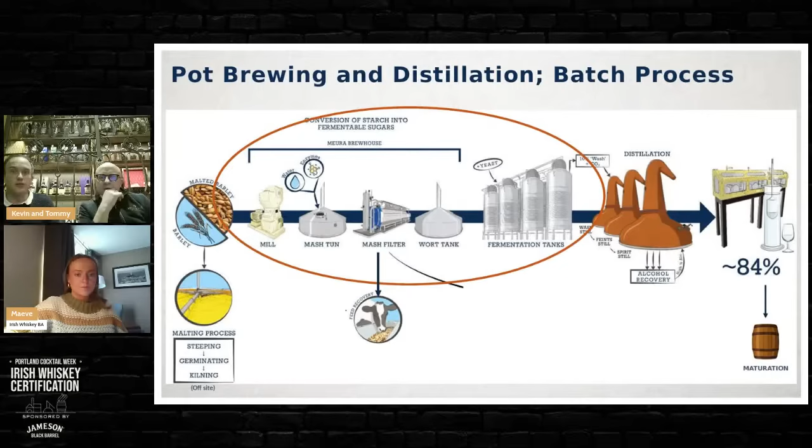So we'll have a look at the raw materials, then the various processes that lead up to distillation. So milling, mashing, filtering, fermentation, basically to the point where we create alcohol. And then when we talk about distillation, it's how we refine that alcohol a little bit further.

So the first block of processes in the whiskey production process is collectively termed brewing. And you've obviously heard that name before, as we probably more commonly associate it with beer. And really that's just showing that whiskey does start off life as a beer.

We touched on some of the history of whiskey last week and how it came into being. Beer has been made for thousands of years, just a natural progression. When the technology of distillation came on the scene, we took it that step further. So yeah, we are going to make a beer to begin with here.

We're going to go a little bit deeper on the grains themselves tomorrow, but definitely have to point them out here. So we're talking about pot still whiskey. The GI is very specific in how you can produce pot still whiskey. So the two grains on the screen here, barley and malted barley, Kevin's already mentioned them. Really you're thinking of that as being barley in two different forms. Barley, sometimes referred to as unmalted barley, just to distinguish the two.

It's a species of grass. What's unique about pot still whiskey is that we use it in its raw or unmalted form. So we just call it barley. That's really unique to Irish whiskey. Outside of the craft scene, maybe in some other countries, none of the big international competitor brands are really using unmalted barley. It's what sets single pot still whiskey apart.

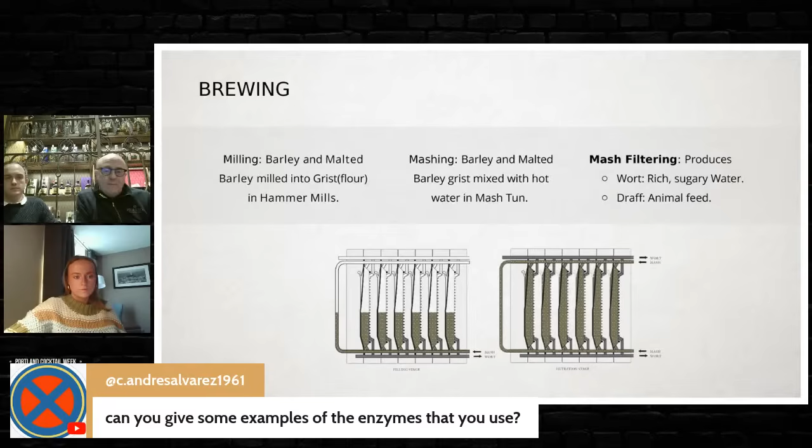However, in general, depending on the malt barley, depending on the growing season, depending on the quality of the malt barley, we would try to rely on the malted barley itself, but we are allowed to add exogenous enzymes. And they're looking for examples. Basically, you're supplementing alpha amylase and beta amylase to break down that starch. That's what you're doing. Perfect.

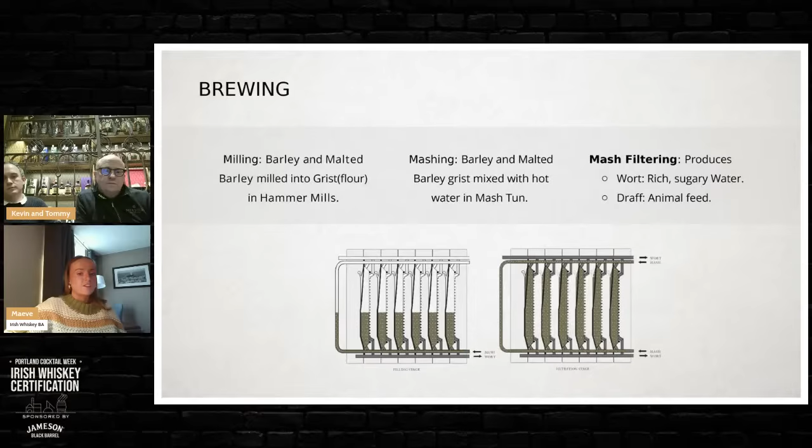And we just have one more question which I think is a good one to cover. Is there a general duration of time that the grains are fermented when making the Irish whiskey? Yeah, so we're going to look at ferment, moving on to that. Perfect. We'll get into it next. So right now, essentially we have a sugary water at this stage, again, called wort. So fermentation then is where we essentially convert the sugary water into, again, what's basically a beer.

So for this, we need another raw material, which is yeast. Yeast is actually a fungus. So there's thousands of different kinds of yeast strains around the world, like in the air outside, just naturally in the environment. We use a very particular strain though. So obviously for reasons of efficiency and consistency, we need to use the same yeast strain each time.

So we use Saccharomyces cerevisiae, which I know is a bit of a mouthful. You can just call it distiller's yeast. But if you know the scientific name, you can remember exactly what it does. If you break it down, saccharo means sugar, myces means fungus, cerevisiae, beer. It's the sugar fungus of beer. So basically, this is a fungus that we're going to feed sugar to, and it's going to make a beer for us. That is the fermentation process in a nutshell.

Now, you can get yeast in lots of different forms. You can get it powdered. You can get it pressed, which is kind of like a putty. We use it in what's called liquid form. Essentially, very easy to use. With the powdered yeast, you have to do a lot of activation and stuff. Liquid can essentially be mixed in with the liquid wort, and there's not a huge delay in the actual sequence. So we use Saccharomyces cerevisiae in liquid form.

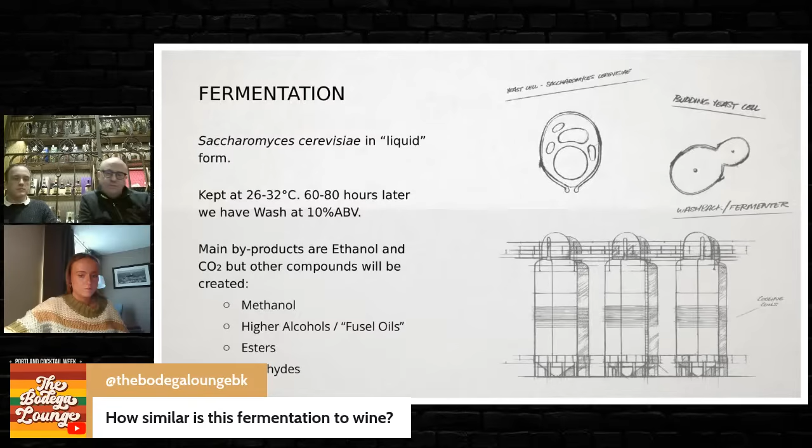And the pathways which Tommy spoke about in terms of all these higher alcohols, propanol, butanol, aldehydes, esters, the metabolic pathways for the yeast for wine would be very, very different to, for example, producing wash or whiskey. So they're quite different. You tend to get a lot more methanol on the wine side. The pectin in grapes produces a lot more methanol, so it's not as much of a problem for us as it would be for, say, maybe a brandy or a cognac producer. I suppose that's one slight difference.

And I suppose we are going to distill at this stage. With certain wines, you're going to be fermenting in the cask. That's not going to happen with the whiskey casks that we'll be talking about next week. We're putting in a distilled spirit. There's no fermentation in our casks.

Yeah. So if you take wine to its next step in terms of distilling wine, then you have your cognac, brandies, etc. So that would be the next step in terms of producing. Even with cider, you could produce apple brandy from the distillation of cider. So really, I suppose it's a very, very different process. The principles and chemistry and biochemistry, yes, there's a lot of similarities, but the final product is very different. Amazing. Thank you so much.

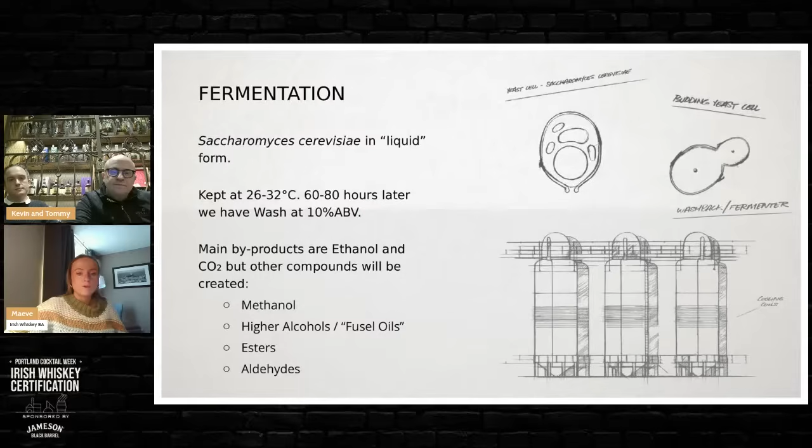And would you say that the fermentation process is like an exact science? We have a question here that's saying, are you measuring the esters and flavonoids? And if, say, after 80 hours, it's not where you want it, are you fermenting it longer, or how does that work? Yeah, we tend to have a pretty standard process. I mean, we have a very automated control process that we've built up over the last 30, 40, 50 years.

So with a process like ours, once you control the inputs, and what I mean by inputs is the barley, the malted barley, temperature profiles, yeast addition, all that, once you control your inputs, then you're in a very good place to control your outputs and to get a consistent output. So we don't get much variation in terms of our final wash profile. Temperature is very important because the yeast is very much dependent on temperature. If the temperature goes too high, it will kill off the yeast. So we control the temperature.

During this fermentation process, there's a big buildup of temperature because of the activity of the yeast. And that's why, as Tommy mentioned, we have cooling coils on the outside to keep the temperature certainly no higher than 32 degrees Celsius. Anything higher than that, you're going to end up with a problem with the yeast. So yes, we do check the flavor profile and the profile of our fermentation, but I'd have to say it's a very, very consistent process.

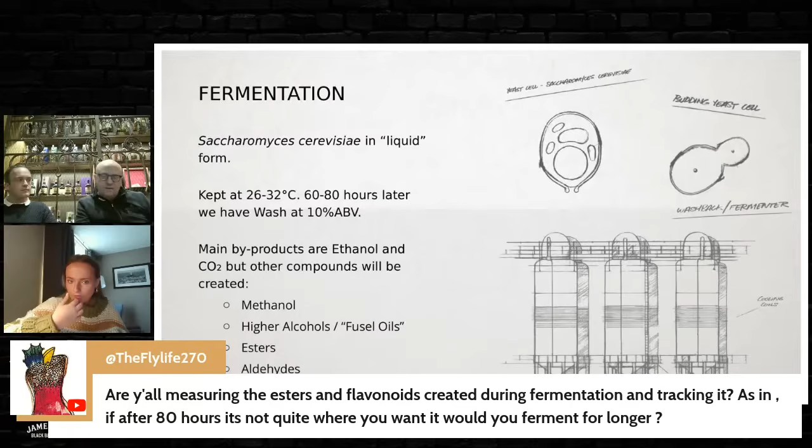Even during summer here, not that we have very good summers here, but if the temperature during the summer gets up, it will put pressure on our cooling water. But because we have a sufficient supply of underground cooling water, that doesn't cause us any problem either. So I hope that answers the question, Eve.

That's perfect. We've actually two last questions that kind of cover the same topic just before we move on. If you could maybe just clarify a little bit more on the type of yeast used, if it's consistent with all Irish whiskey, or if the distiller's yeast is a specific type to the category.

Yeah, so we use what we call a distiller's yeast. There's probably quite a number of distillers in Ireland that would use that particular type of yeast. We've been using distiller's yeast for, oh my God, a long, long time. Certainly since the new distillery was built in 1975. So that's what, 50 years. So we wouldn't have changed.

But there's no reason why other distillers in Ireland wouldn't use that particular strain, or they might source it from different yeast suppliers and it may be a slightly different strain. So there could be variations in the type of yeast, but for Midleton, we've been using the same strain for well over, I'd say, 50 years or more. Amazing. That's perfect. I think we're good to move on.

Yeah. So at this stage, as Tommy has described, we have what we call a wash, or I suppose you could call it a beer, at about 10% alcohol by volume. Okay, so that's where we are. So I suppose we have to move on now to our distillation step. How are we going to take out the alcohol from that wash, which is at 10%, and we end up with a spirit at about 84%. So what are the steps we take to go from a 10% wash to about an

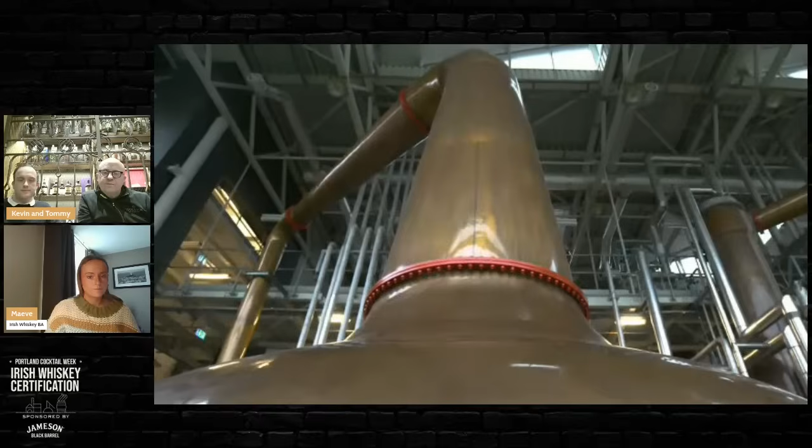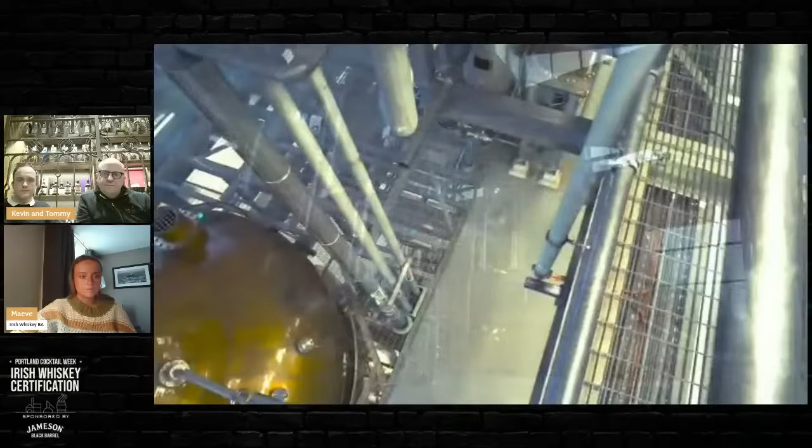So I think we have a video here of the pot stills in the Garden Stillhouse, if Maeve wants to play that one. So just take about a minute. So there you can see the base of the still, and then the vertical part is what we call the swan neck, and then the lyne arm is coming off the swan neck into the condenser. Here you can see a plan view, the base and your swan neck. Here's your sight glass for looking in, and here is your boil taking place in the pot stills as you apply the heat.

Now, the heating process, again, if you go back 60, 70 years or more, would have been what we call direct fired stills. And that's where you would have coal underneath the pot still. And then obviously set fire to the coal, you have your fire, you start to heat up your still. And that's what we call direct fired stills. Now, very few places in the world have direct stills anymore. I know there's a limited number in Scotland. There might be a small number in Ireland as well.

But we've moved probably in the mid-70s, and certainly when we moved to the new plant in 1975, to what we call indirect heating. So this is where you circulate the wash, for example, through a heat exchanger, and using steam as your indirect heating source, you basically heat up your wash gently, keeping recirculating. Your wash heats up and eventually starts to boil off, and you produce these vapors. So that's what we call indirect heating of stills. It's a lot safer, it's a lot easier to control, and you don't have any burn on, which was a big problem with direct fired stills.

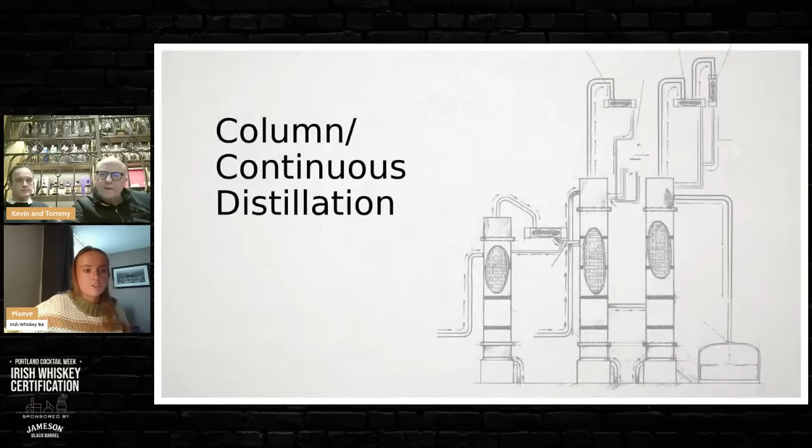So just to jump right back to the start, guys, Kevin mentioned that we are making more than one style of whiskey at Midleton, which is kind of unique. We touched on that last week in the global whiskey industry. It's quite rare to have one distillery producing multiple spirit types. We're all here today because of Jameson, which is a blended whiskey predominantly, but it's probably quite different from your notion of a blended whiskey from some other countries. It's grain to glass production at one single distillery site.

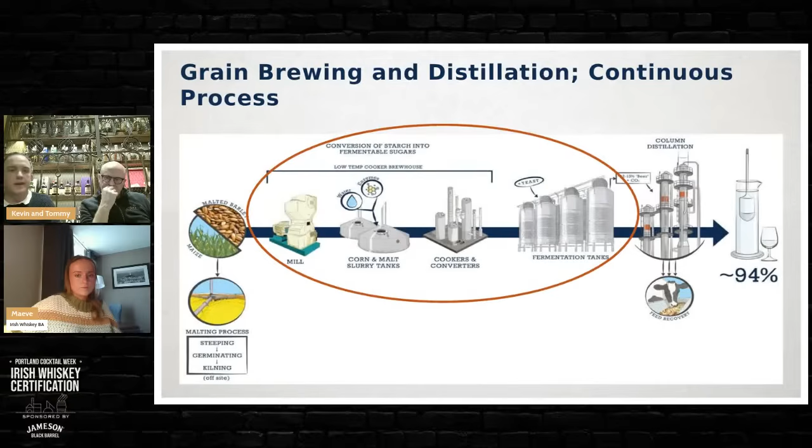So we're producing the pot still whiskey, and we're also producing the grain whiskey. And there's a few important differences on this side. Again, we're going to follow the process up to distillation, and then I'll hand over to Kevin. Some similarities, some big differences though. The first big difference is the raw materials. When we talked about pot still whiskey, we talked about barley in its raw or unmalted form and in its malted form. For the grain whiskey, we do use malted barley. It's the exact same Irish malted barley produced in the exact same manner.

So that's our first ingredient for our grain whiskey. But the second ingredient is maize, or what you guys probably call corn. The reason we use maize is that maize has a much higher sugar content than barley, over 70% sugar or starch content. Higher sugar content means a higher yield; it's more efficient.

And really the concept of grain whiskey, we briefly mentioned it last week. You're really going back 200 years, the advent of column stills. It was a very new style of whiskey, almost a revolution in whiskey. The concept here is to produce a higher strength spirit that has more of a light, delicate flavor profile. Maize or corn is really, really suited to column distillation.

The high sugar content allows us to get really good yields here, and we'll talk about that as we go through the process. So the main ingredient here is the maize or the corn. It's a heavy majority there. And then you've got your malted barley as well. As I said, there's a lot of similarities here.

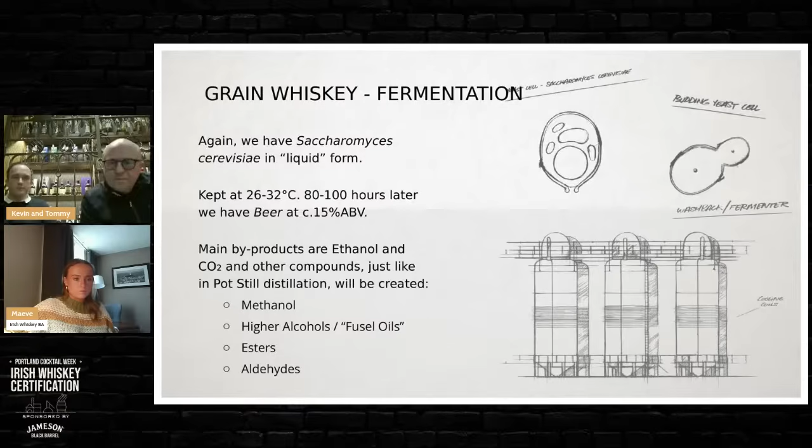Okay. Any questions so far, Maeve? We okay? We're all good for questions right now. Oh, good.

So in terms of column stills, we have 3 column stills in the Barry Crockett Still House. If you look at the right-hand side there, that photograph, it's one of the column stills in the Barry Crockett Still House. And that goes back to 1975. Just take note there that the majority of the column is stainless steel, including the plates on the inside, but there are copper sections. And again, these copper sections are really important in the extraction of sulfur compounds.

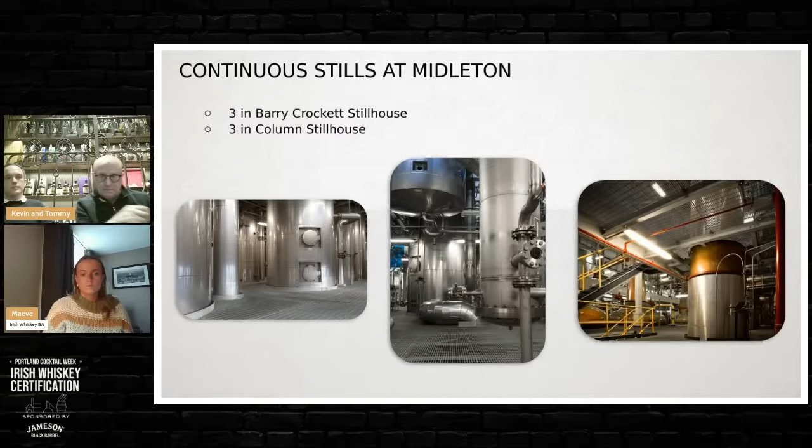And then on the left-hand side, we have our newer columns, which were installed in 2013, 2014, as part of a Midleton expansion. Again, these are stainless steel. And then we have sections of those columns that have what we call copper packing. So this is like pieces of copper that are inside in sections of the column. And basically, again, it interacts with the vapor and the spirit to extract sulfur compounds. So the old columns used to have sections. The newer columns have what we call packing. So they're photographs of the continuous stills.

So how does it work? Again, I've mentioned that the newer columns are stainless steel with copper packing. And what you have is a series of plates inside the column. There are 3 stages to the distillation process. We have a beer column, we have an ED column, extractive distillation column, and we have an EDR column, which is extractive distillation rectification column. In each of these columns, we're increasing the strength, and we end up with a spirit at about 94.5% ABV. If you remember back to the pot distillate coming off the third still, it was about 84%. Here we have distillate at about 94%. So again, it's very much different aroma, different style, different flavor. And I'll explain that in a few minutes.

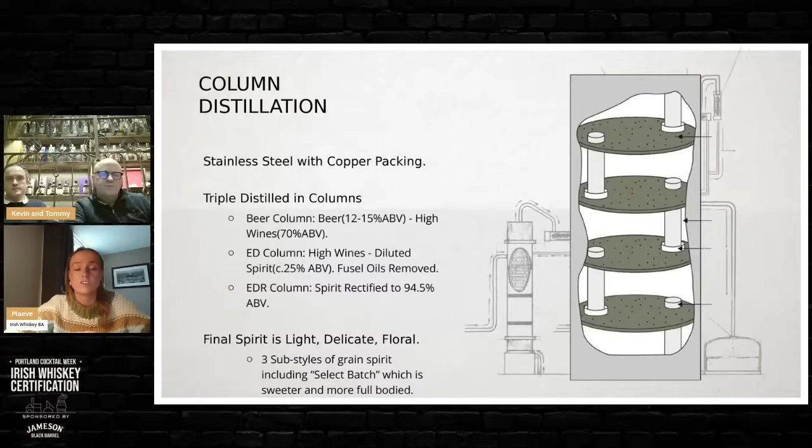But just maybe Maeve, the question previously on volumes, if you use an example here, if you start off again with 10,000 liters, just take it at 15%. So you have 1,500 liters of alcohol to extract. So then you'd end up with somewhere like 1,600 bulk liters at, say, 94.5%. So you go from, say, 10,000 liters down to roughly 1,600 liters in this particular case. I suppose that might be the question that was asked originally. Okay, great. Is that clear? That answers it perfectly.